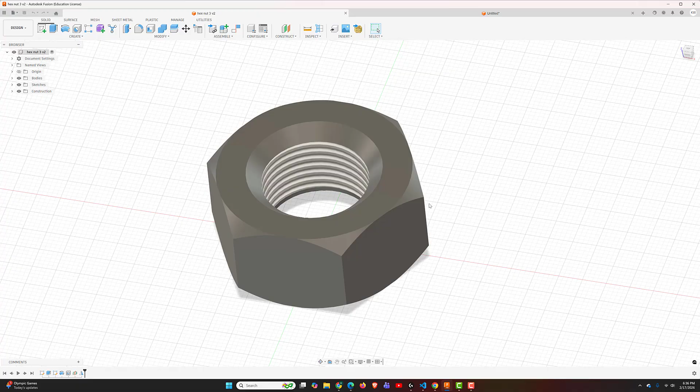And the way we're gonna do that is we're gonna create a sketch and then we're gonna revolve it around, cutting away that material. So I'm gonna go back to my project and I am going to view it from the front. And I want to create that sketch on the plane that is cutting right through the middle. So it's important that when I go to create this, that I don't just try to click like this, because that's going to create it on the front of the nut.

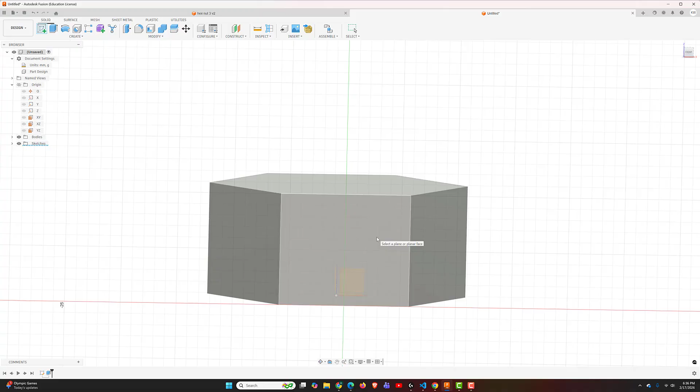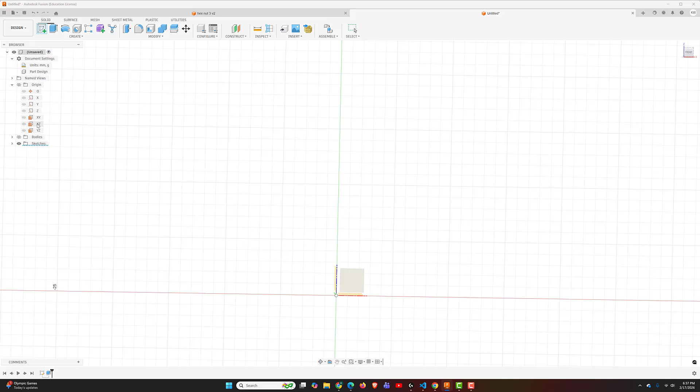So what I'm going to do is I'm actually going to temporarily hide my bodies. And now I can make sure I'm hitting that, or from your origin, you can expand that and you can specifically click on the XZ in my case. If yours is rotated, it might be the XY instead. Mine's the XZ. So I want to make sure I create the sketch on that, and then I'll bring my body back.

And then I'm going to project this corner point to the new sketch to make sure that my triangle lines up correctly. So I'm going to go up to Create, go down to Project, or you can just hit P on the keyboard. I'm going to select that point and then say OK. So that's going to bring that point to the new sketch. Now I can draw a triangle based off of that.

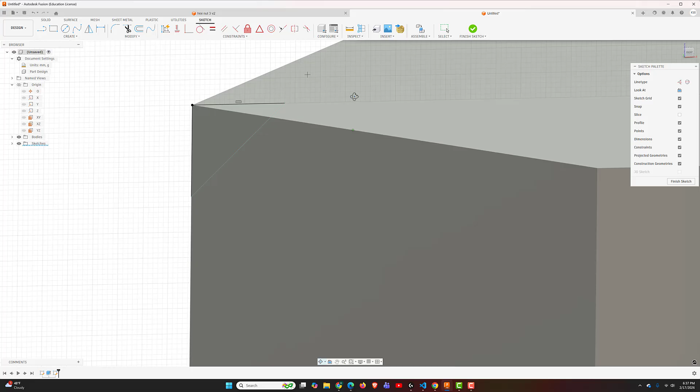So I'm going to use my line tool, start at this point, go over, go down, and then make sure I go back up and connect that to get my blue shape there. So you can tell that that is a solid shape. Then before I finish the sketch, I'm going to go back to my front view here. Before I finish the sketch, I'm going to add sketch dimensions to this. So I'm going to come up here and say sketch dimension.

Click on this line, and it is not letting me click it, so I'm going to hide this body again so it's not in the way. There we go. I'm going to make that 1.5, and then I could make this 1.5 as well, but if I were to ever update this and decide I want more of a curve, then I'm going to have to update both. So instead, I'm going to use this equal constraint, and I'm going to say I want this line always equal to this line, and then that way if I ever change that, both lines will change.

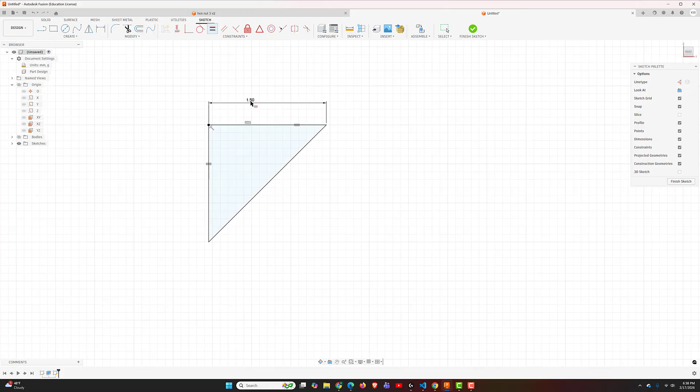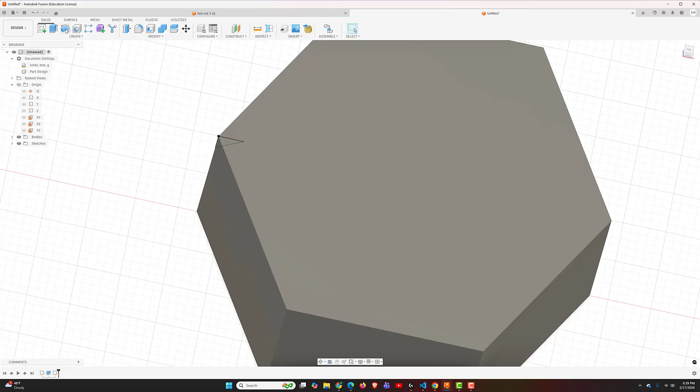All right, so now I can bring back my body. I can finish my sketch, and I am ready to do the revolve. So we can see that that sketch is sitting here right in the middle of my nut. So what I'm going to do now is go up to my revolve tool, and it should see that that is the only active body and automatically select it. If it doesn't, you might have to hide the body, select that, and then bring the body back.

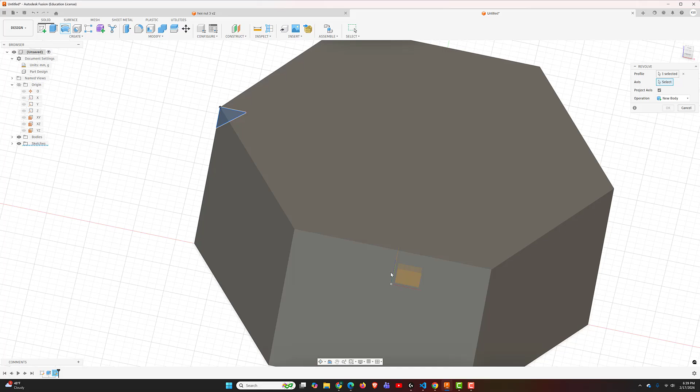Then for my axis, I want it to go around this axis that goes up through the nut, which in my case is the Z axis. So I can try to go down here and select the Z, but if you can't get it, you can always go over here and select it.

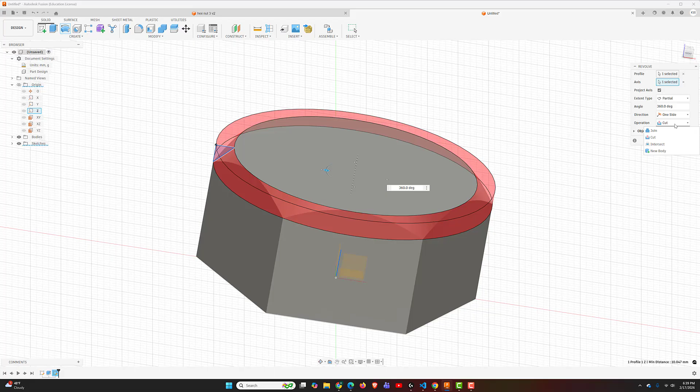And you can see that it already turned red because it recognizes that as it's revolving, it's running into my existing object. And so it has defaulted to a cut mode, which is exactly what we want. If it didn't do it automatically, I would just need to manually change that to cut. I'm going to say OK, and there we go. I've got my rounded corners.